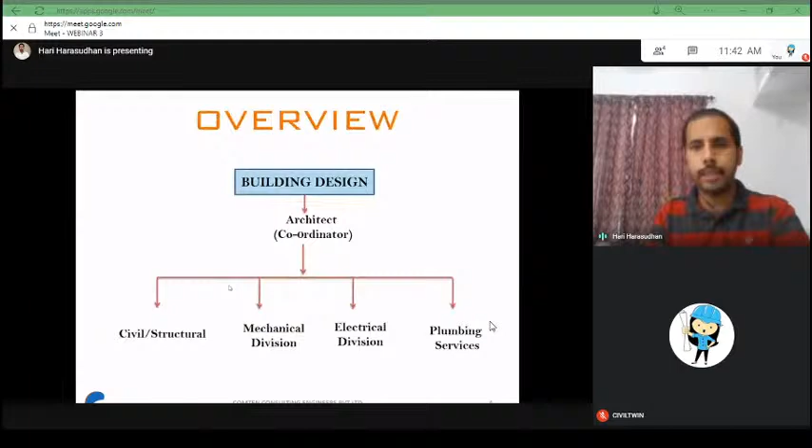In this particular session, I'm focusing only on civil or structural. The other three divisions will not be covered in our topic. So in civil structural, you should start with the conceptual design, then you have to make a schematic, then you will be doing a detailed design.

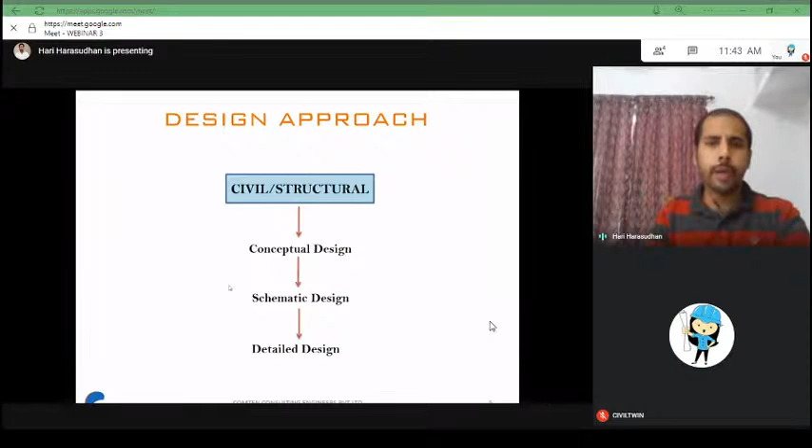In the conceptual design, what we actually do is discuss with the architect and frame whether we should go with an RC structure, steel structure, or precast system, since a lot of other technologies have been booming. So you should understand what kind of structure you should begin with - whether it's a very small commercial building or particularly a residential building, it will mostly be RCC structure.

And if it is a small commercial building, nowadays steel structure is also viable in many cases. For example, if you're designing a car showroom, or even for a small size hospital, nowadays they are doing steel structures. Every option will have some limitations and also advantages, so analyzing all the aspects, you have to freeze what the concept is.

Then precast system is also now one of the emerging technologies. It has its own advantages and also limits. You should understand this and fix accordingly.

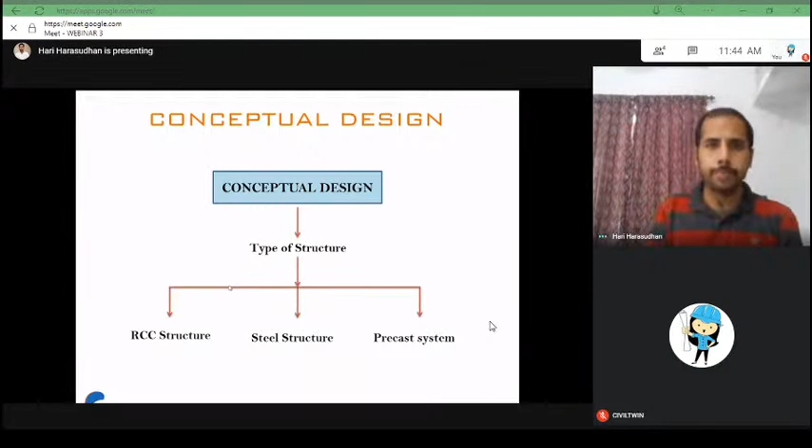Then going to the schematic design: once you have fixed the structural system - whether you're going with an RC system, a steel system, or precast - the next level of development is to freeze the member system, like what kind of horizontal members you can go with, and what kind of vertical members you should opt for.

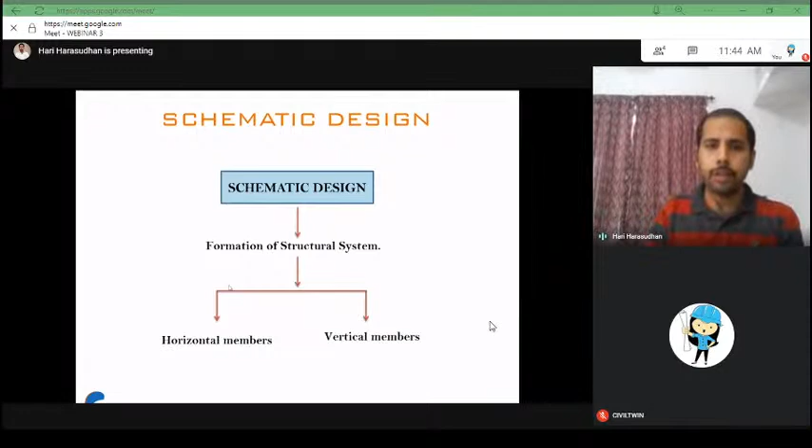For horizontal members, whether you go for a conventional slab beam system - one of the old systems where you can see a deep beam and slab along the horizontal members - or a flat slab, where you won't have any beams, and you can see the column capital or column head at the column position, wherever the column supports the slab. Then another option is flat slab with PT - when the span is more and you want to restrict the slab depth, you can go with the PT option.

And another thing is composite steel floor decking - it means a combination of steel as well as concrete. So you should freeze the system of horizontal members and vertical members at the schematic design level.

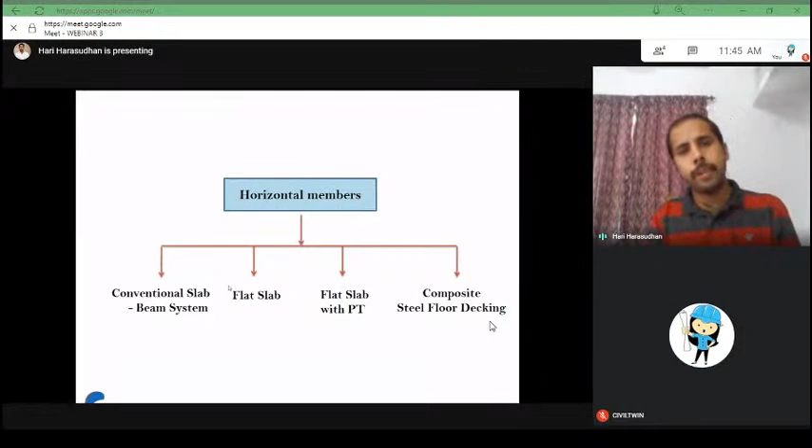For vertical members, they generally resist axial loads and also bending due to lateral forces like seismic or wind, which you have to consider. This lateral force will generate shear and moment in the vertical members, and you should decide whether columns alone should take the lateral force, or shear walls should take the entire lateral force, or you can make a dual system - for example, 25% of the lateral force taken by columns and 75% shared to the shear walls. If it's a steel building, normally bracings will be the lateral force resisting members. These are the things we freeze at the schematic design stage.

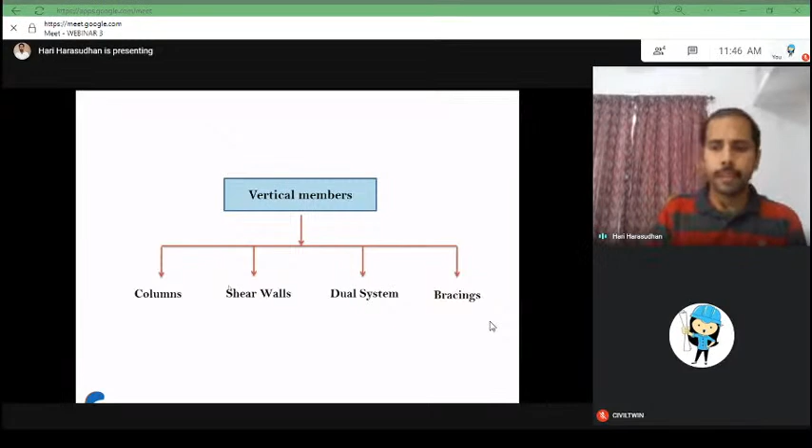In detailed design, you will be doing the structural analysis once you freeze this scheme.

You'll be modeling or analyzing using manual tools. At any stage you should be confident and be a master of your design. You should not rely completely on computers, and you should not let the computer master you. You should master the computer. It's just a tool. Whatever instruction we give, it analyzes to make the time and cost efficient, that's it. We should not allow the computer to master us, right?

Any output the computer gives, you should be able to justify whether the analysis shows correct behavior. When you do a small conventional error in assigning, it will become the other way. For example, for a simply supported beam, rather than giving a bending moment at the bottom, it will show it at the top, entirely opposite. So when you make assumptions or feed the input, you should do it correctly, and you should be able to check whether the computer is giving correct behavior. You should not simply believe the computer to do everything.

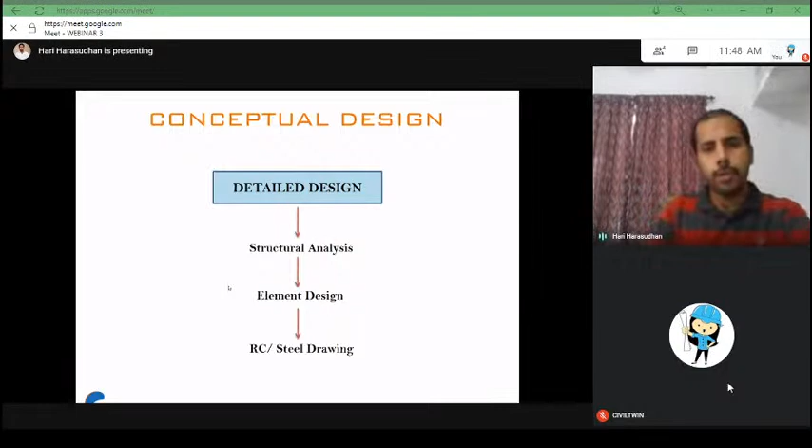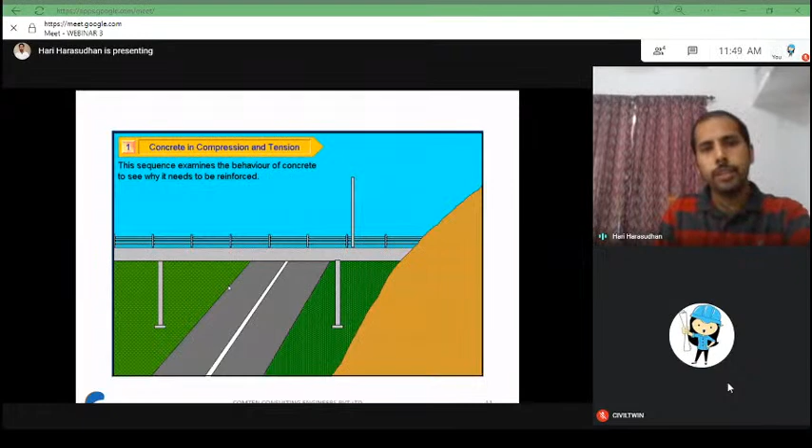So it's a very simple example to understand how each element behaves under various kinds of forces. Here is a very simple bridge. If any vehicle comes and goes over it, you should know what kind of force it will create in every member. Here you can see there are two members: one is the horizontal member, the slab portion of the bridge, and another is the column, supporting that bridge.

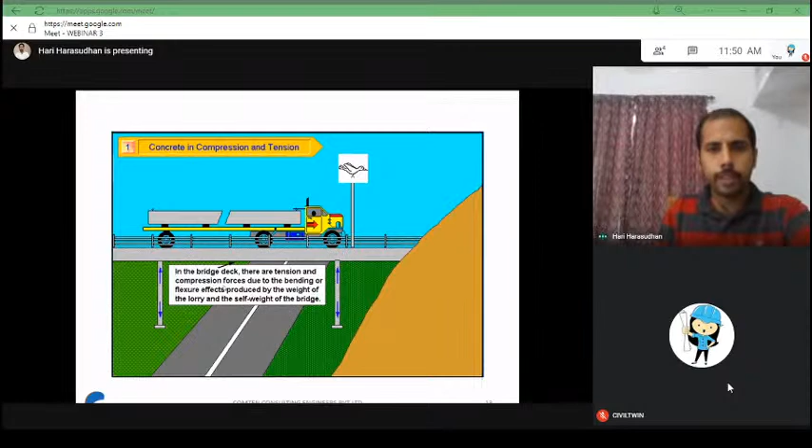When a vehicle or heavy vehicle is standing on that bridge, you know what forces will act on the column. The concrete in the column will experience compression, and maybe a moment based on the slenderness. So mainly compression is the predominant force in the column. If you come to the horizontal member, I can divide it into six portions: left end top and bottom, middle top and bottom, and right end top and bottom.

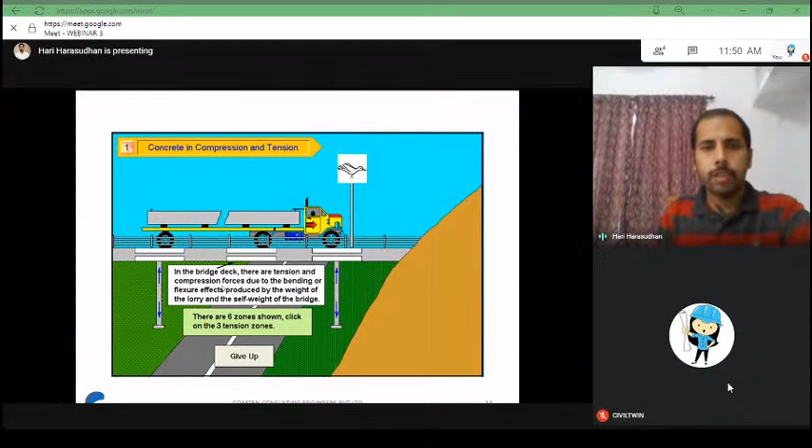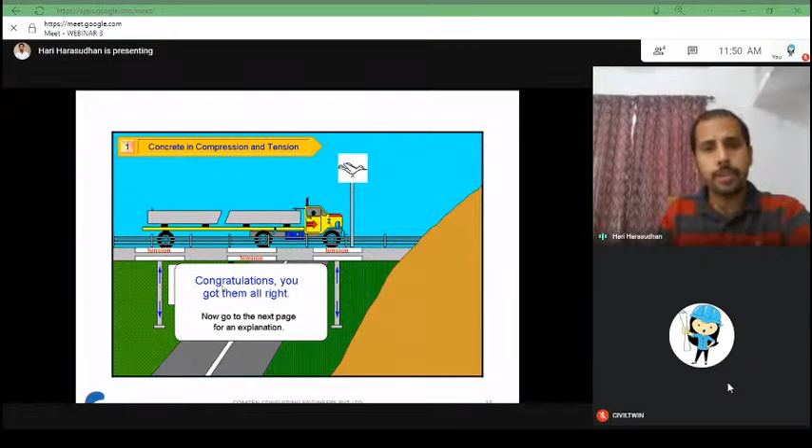Whatever kind of forces act, you should fit it there. For example, in the left top, what kind of force will act? Anyone can see it's like a continuous beam, so it's very common sense that in the left top and middle bottom, it will experience tension, and also in the right top it will experience tension. It's very clear, and the other areas will be compression.

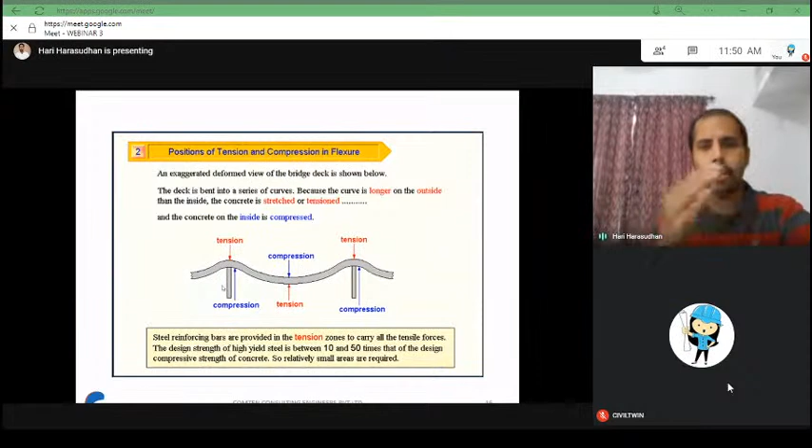This kind of behavioral deflection will happen in that bridge, not to this degree of freedom, but to understand, this is the behavior the horizontal member undergoes when a force acts. You can see where the portions get tension and where they get compression. This is a very simple example. If you understand this small basic concept, you can do any design.

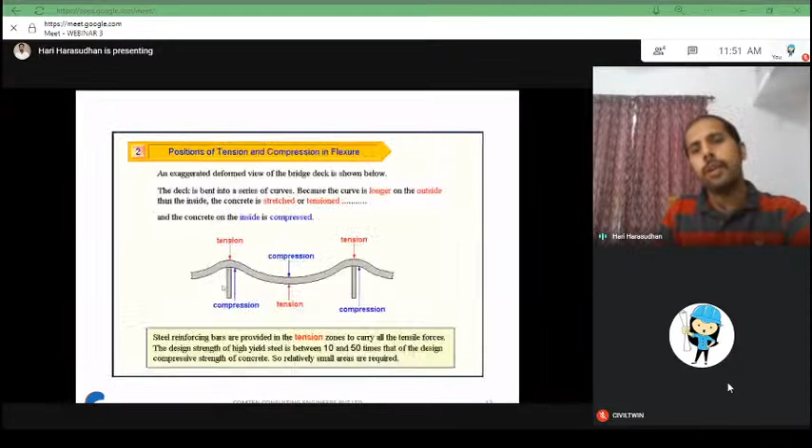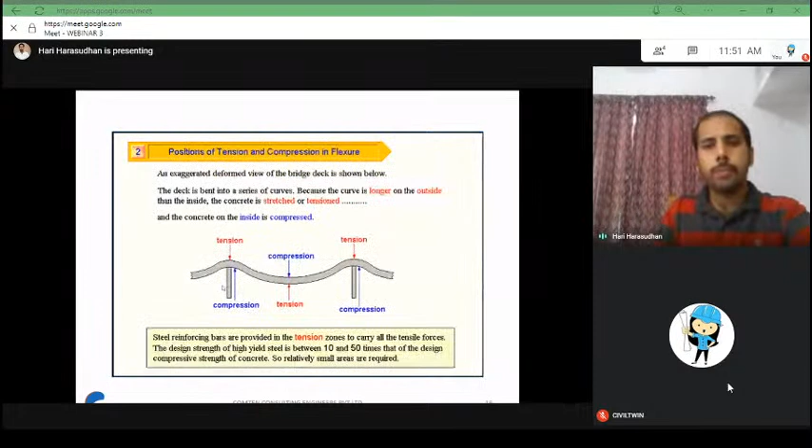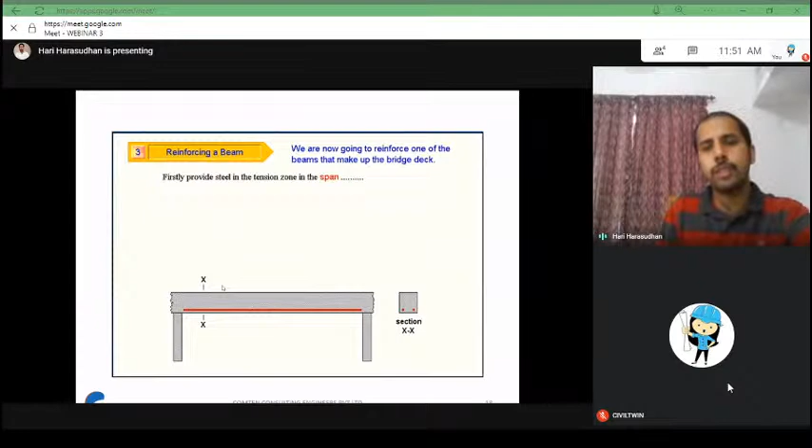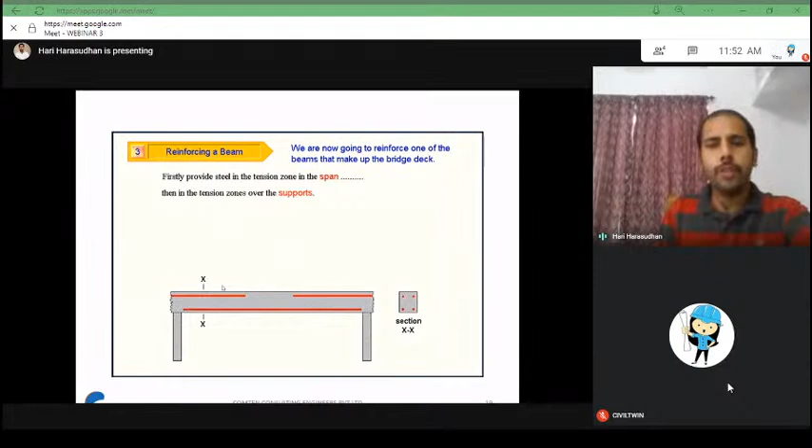You will be providing some minimum steel to hold the shear links. Shear links will take care of the shear forces, and you can compare with if you make a shear force diagram, and if you do the shear link reinforcement design, you can understand what is the importance of shear links.

Yeah, this is how a complete design of one continuous beam looks. You can see the tension reinforcement and the shear links as shown in this presentation. So you can easily understand how we have to design for what forces, and what kind of impact it will have on each element.

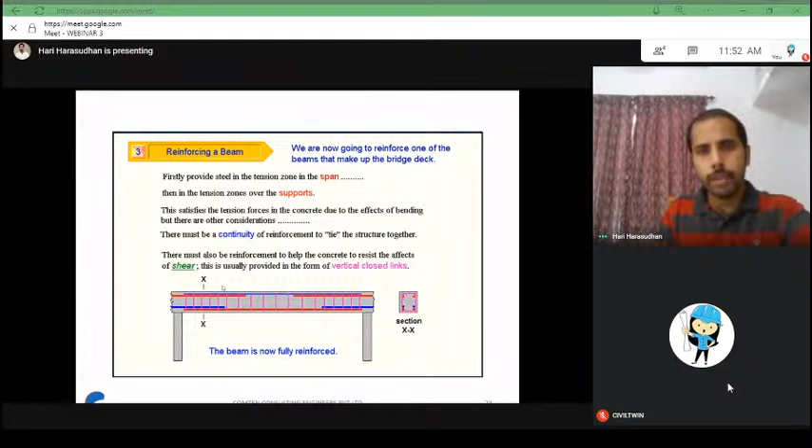When it is a foundation, we'll be giving more cover. When it is a beam, we will give some cover. For the column, we will pick some cover. For the slab, we'll have some cover. So it is this concrete cover that will protect the steel, based on the exposure condition. If it is a seashore area, we'll give some cover. If it is a tropical inside area, we'll give some cover. It acts like a protection to the steel.

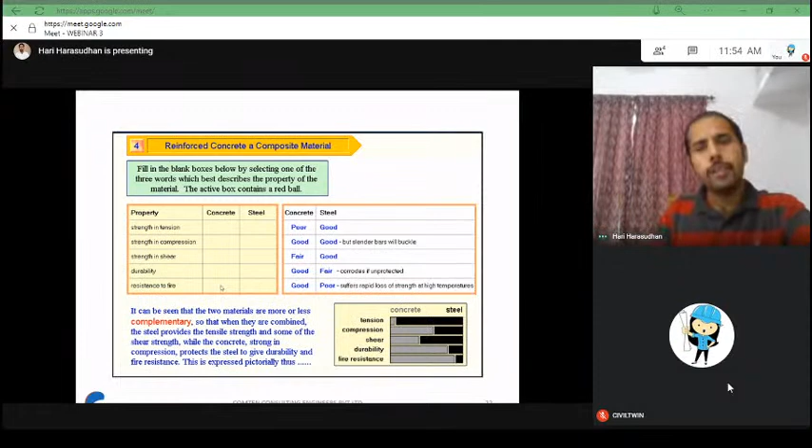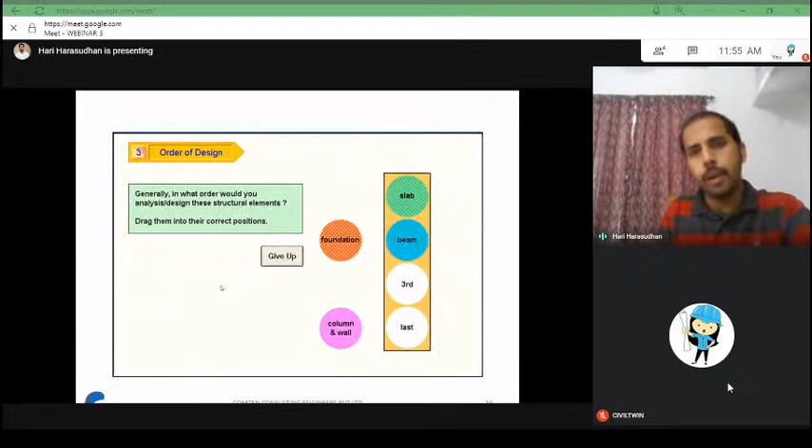Then you have to see the order of design. If you complete any model, like if done in any software, you should start with designing the slab, then slab to beam to beam, beam to column, then finally take it to the foundation. Let's see why we go in this order.

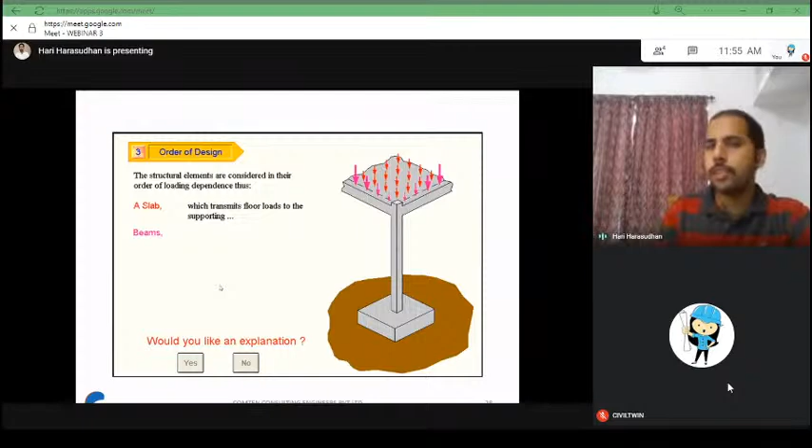Initially, you put the slab loads on the slab member. From the slab, the load will go to the nearer beams depending on the distribution aspect, whether it is a two-way distribution or one-way slab. Based on the kind of distribution, the loads will transmit to the nearest beam member. So all the beam forces will collectively go to the columns as a shear force on each beam connecting to the column. So beams transmit their loads to the column.

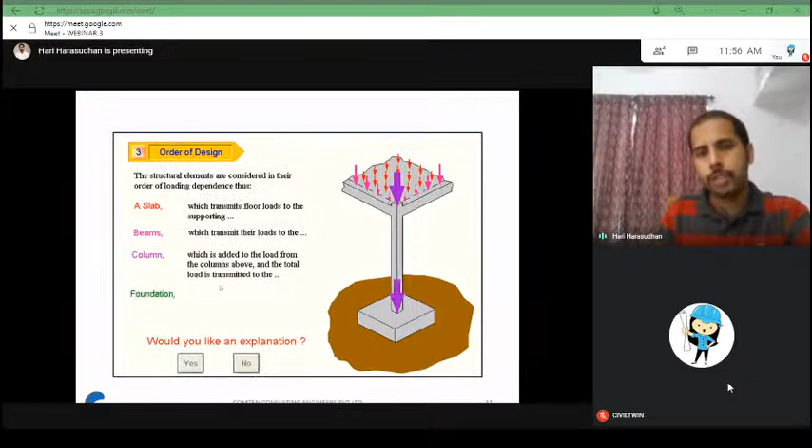Then the column in turn will transmit to the foundation, that is the footing. From the footing, it will transmit to the soil based on the bearing pressure. So if you want to design the foundation, the bearing pressure of soil is more important. You have to do the soil investigation. If it is a very rocky terrain, the footing size will be much smaller. If it is very loose soil, like clay, you will find the footing needs to be of higher size.

Yeah, so the idea is, what is the role of a structural engineer or civil engineer?

If you are doing a design for any type of building, the key idea is you should transmit the force from the functional area. For example, if you are designing a school building, your purpose is to serve the area for classrooms, where loads like students and their benches, tables, or whatever materials will be loading on that. So the load due to dead and live forces has to be properly transferred from the slab to the beam to the column to the foundation. That is the core idea of structural design.

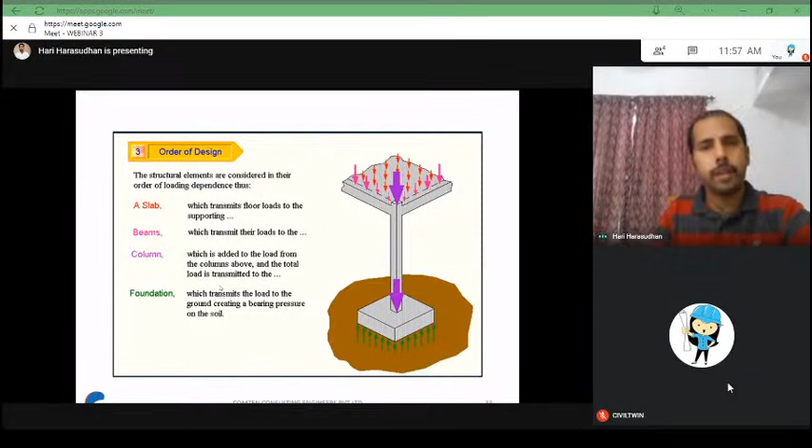You should understand what forces will come to every element, how each element will behave for that force, and how you are reinforcing and designing that member. This is the key idea. And how to design, you can use either manual methods or a computer. Again, I'm emphasizing, when you're using a computer, it's just a tool. You should master the computer, and you should not allow the computer to master your design.

So basics for modeling, the same thing which I've told earlier. You should design every element like column, beam, slab, and footing. Then you should assume what kind of support condition you are making for your design. It all deals with the philosophy of the designer who makes his design. Someone may make it like a fixed support, or someone may assume like a pinned or roller support, whatever it may be for that case. So it's all the design philosophy, the choice made by the designer.

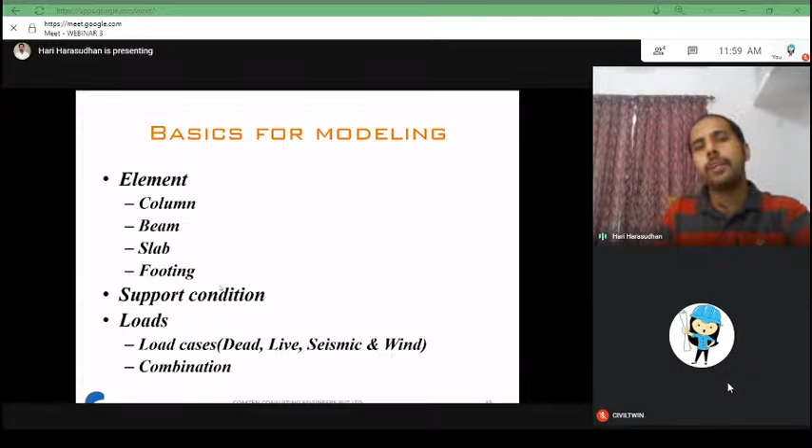You should understand the loads that come to the structure - dead, live, and lateral loads like seismic and wind - and after that you should make the combinations according to the codes. If you are working in a particular country, you should use the combination which their code says. For example, if you are working on an American building, you should use the ASCE codes, not Indian codes or other codes. So it all lies with the client, whoever wants that design.

So the packages are available - for modeling there are some softwares, and for the analysis and for drafting you have softwares. Again, I'm telling you, you should use these as tools only.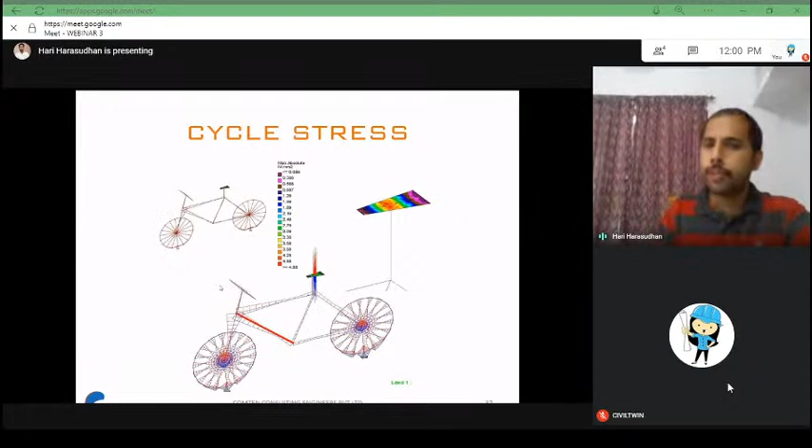So these are the codes. I just want to put to your view that there are standard codes for whoever designs any project for that country. You should follow that code.

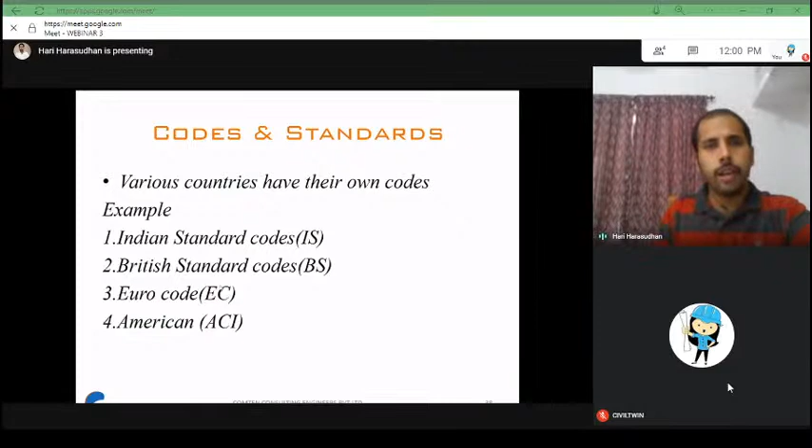For example, Indian standard codes - if you want to do RCC design, you should follow IS 456. For taking the loads, you can see IS 875. For a steel structure, IS 800 is the code. For earthquake design, it's IS 1893. And ductile detailing is IS 13920. Similarly, for each kind of elements - for timber design there's one code, for PT design there's another code. So you should refer to the standards when you're going to design.

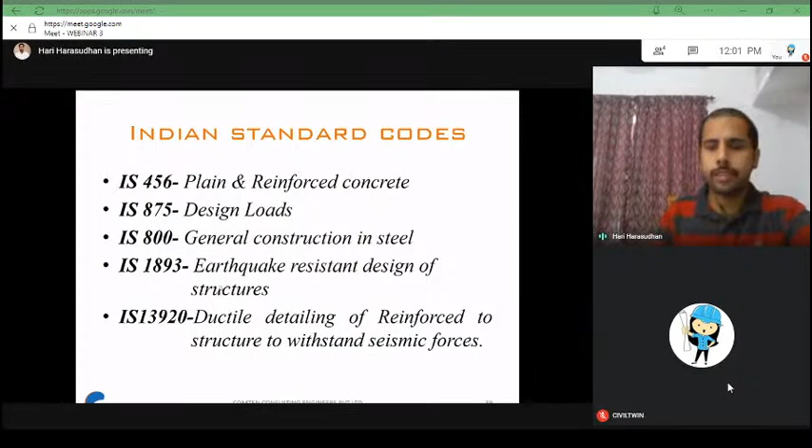Finally, I will conclude - in structural engineering, the idea is you should identify what loads are to be resisted, then how you are taking the load path. You should assume the correct load path. If you are going for a conventional system, or a steel structure, what is the kind of load path you are taking? If you are going for a truss system, an arch system, or a frame system, whatever it may be, that load path has to be defined, and in that load path you have to go for an economical and safe design. That is most vital whenever you are going for a design.

So what is the difference between a professional and those who are practicing out of their experience? When you are going for a professional approach, you will be analyzing and doing the exact safe and economical design.

When persons who have experience are making the design, sometimes they may go uneconomical, or sometimes they may under design. There is a chance. So the professional approach is the safest and most economical approach. You should understand that.

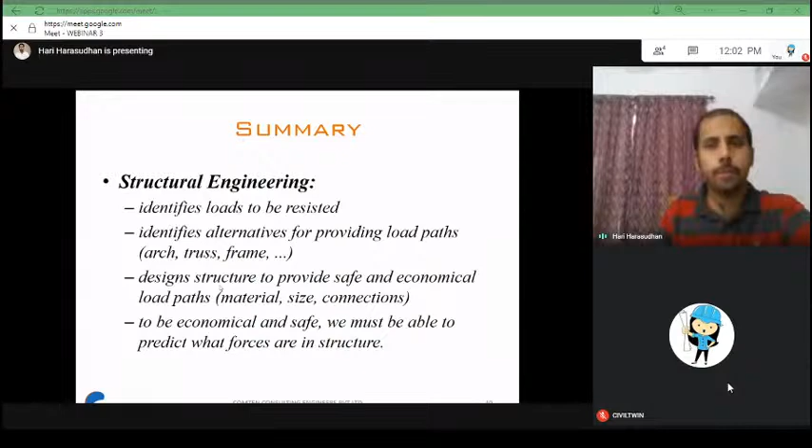So with this, I will conclude my presentation briefly, and I'll also show some of the drawings for better understanding.

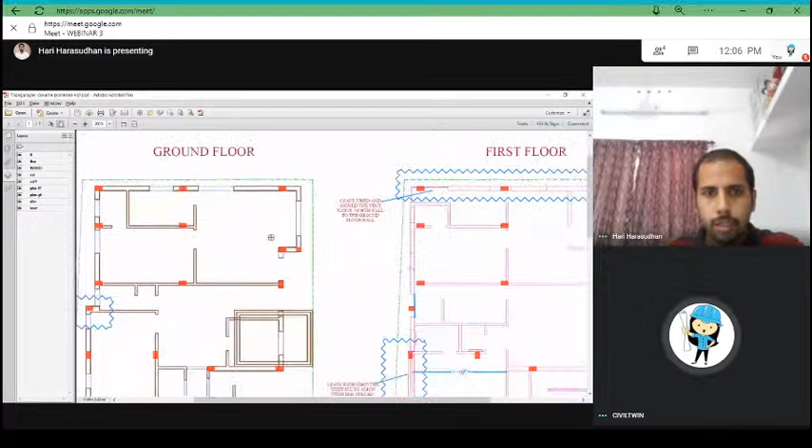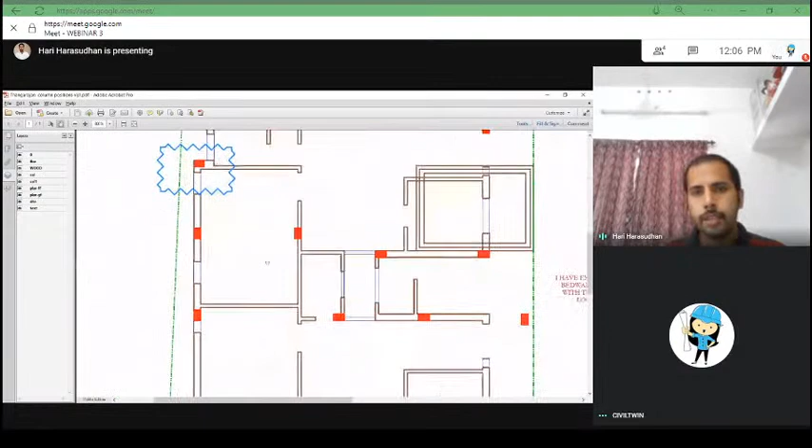So this is one example for a residential building. Normally, the architect will be making the layout for any residential building or whatever the structure may be. And what we have to do is fix the column position in such a way that the architect's idea is respected, since avoiding a column somewhere may affect another utility or look unaesthetic.

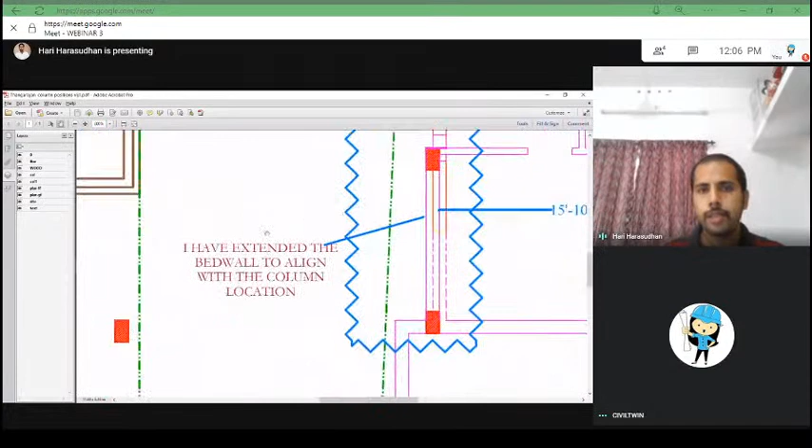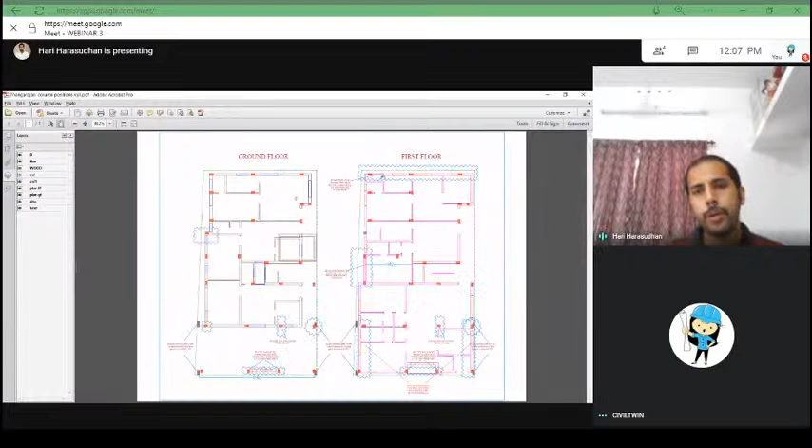He'll give comments like extend the column to the side, or kindly avoid this column. So he'll give various comments. This is the way to start, once the architect has completed the layout, we'll do the column position, then after coming to a conclusion, we'll place the column positions.

Then we'll make a design, we'll make the analysis model in the tool which you are going to opt for.

Is my drawing moving, Manu? You can see whether my drawing is moving. Yes, sir, it's moving.

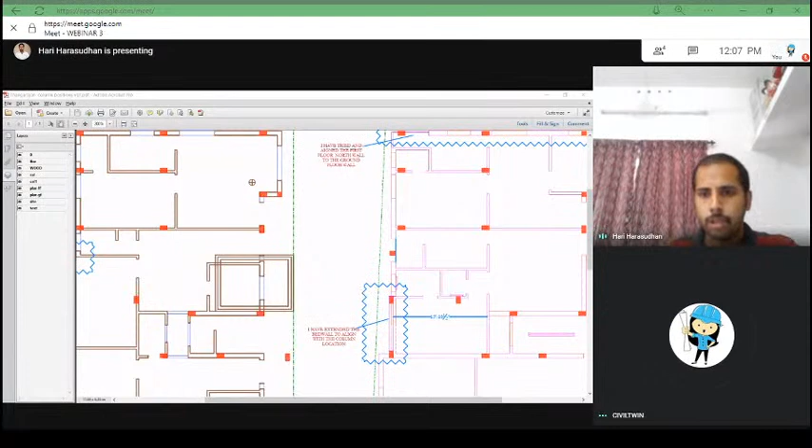Okay, fine. So what happens is, then we fix the column position. Then, one minute.

Can you see the column footing drawing? Yes sir. So this is the footing drawing. For example, after fixing your column position, you will release such a drawing to make the excavation, and for the excavation, also to make the footing design.

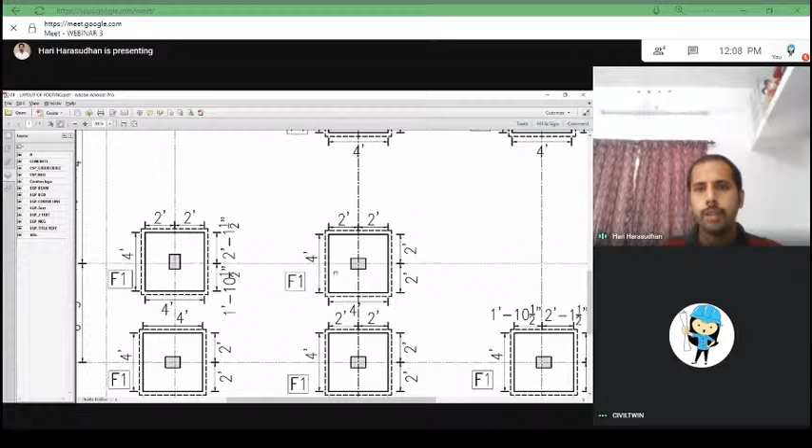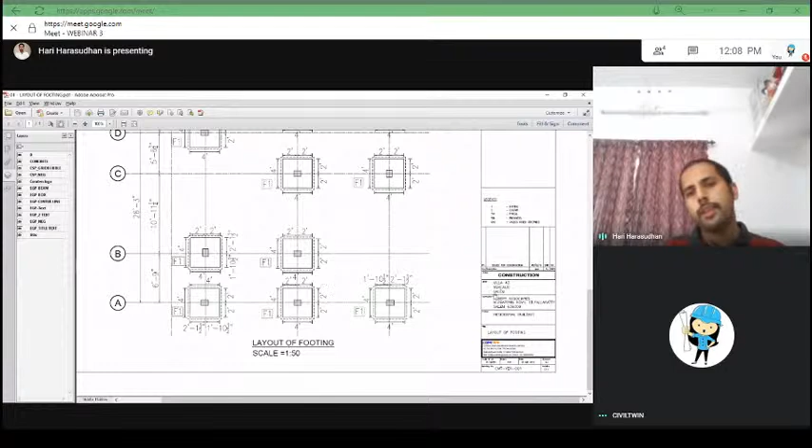So you make the footing sizes, and you make the grid first, and position the column. Then you make the footing sizes, giving the offset from the grid to mark it at the construction site. Based on the drawing, they will excavate the soil, put the PCC, and make the RC concrete pour according to the design, right?

Okay, yeah. Then coming to the column design.

So now, can you see the column drawing now? No sir, no, sorry. Yeah, there's a layout column you can see, I think, hope you can see now. Yes sir, we are seeing, sir.

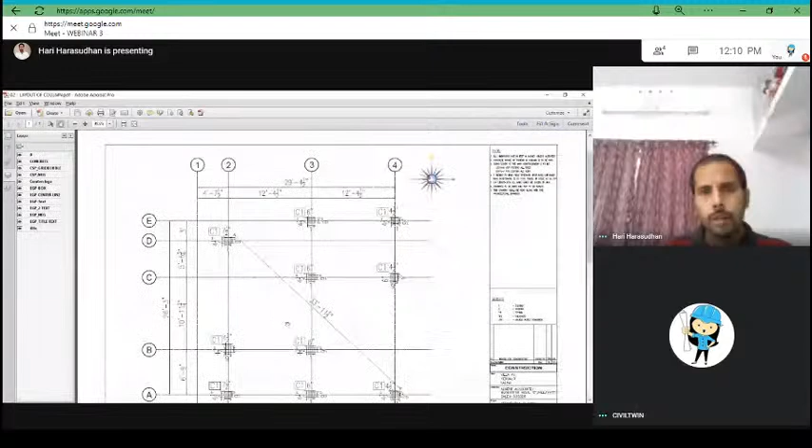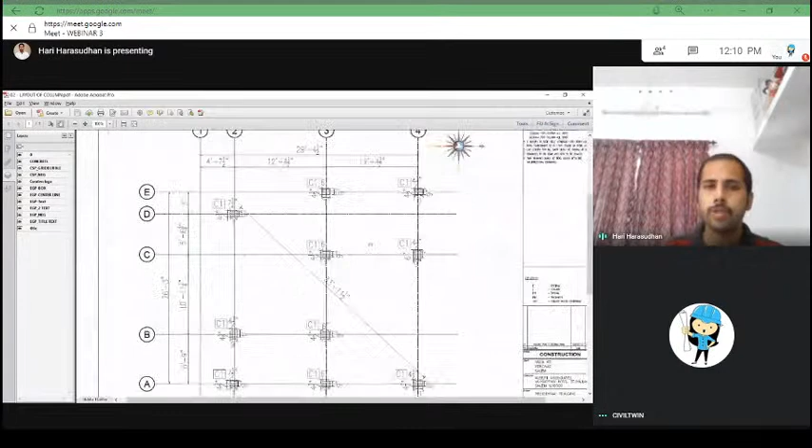Okay, fine. So after making your footing setting out, you should give the column setting out. So based on the grid, after fixing the column sizes, you tell how much offset you need from the grid, and you fix the column. You can do this manually on site, or use digital surveying to fix the column faces. So this is a footing and column drawing.

Then you'll be giving the plinth beam design. You'll be making the layout, and based on the sizes, you'll be giving the reinforcement. So what is the top reinforcement, what is the bottom reinforcement, and what are the shear links you will provide for that beam? You'll be making beam IDs like PB1, PB2, PB3, and you have to refer to the schedule for that design.

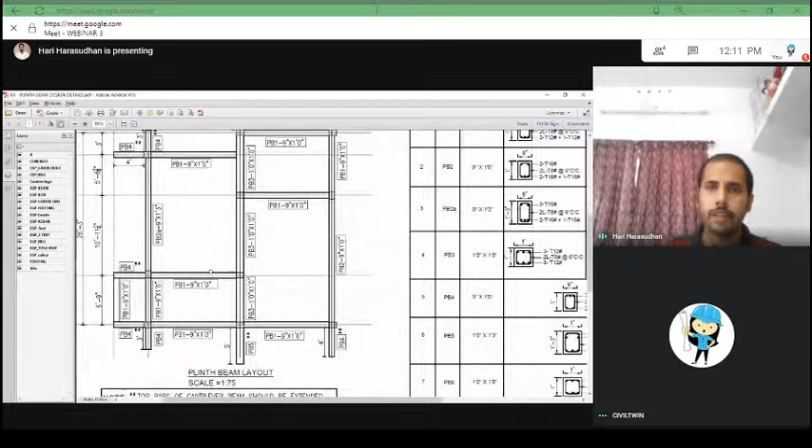The bar bender should follow this schedule and make the reinforcement accordingly. After doing your formwork and placing the steel cage, you have to concrete it.

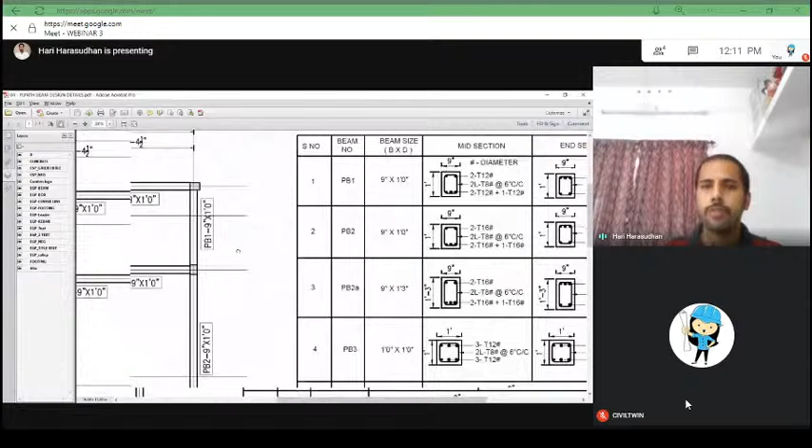In this, there are general things you have to give, like the cover for the concrete structure for a beam and for a slab, what grade of concrete you are going to use for that concreting, and what lap length you are suggesting to implement at site. These are the general instructions you should give while issuing the drawings to make work at site, right?

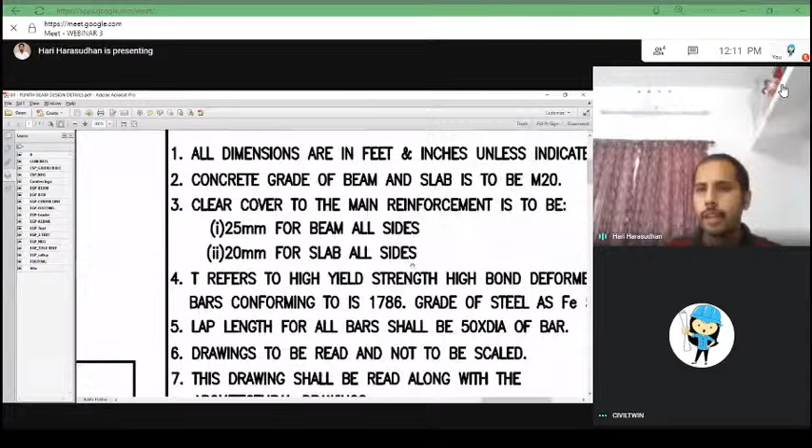And this is a general lapping arrangement for a beam structure. This will be helpful when he makes the reinforcement placement at site, right?

Yeah, so after making the plinth beam design, you should be giving... one moment please... yeah, fine, so there's a...

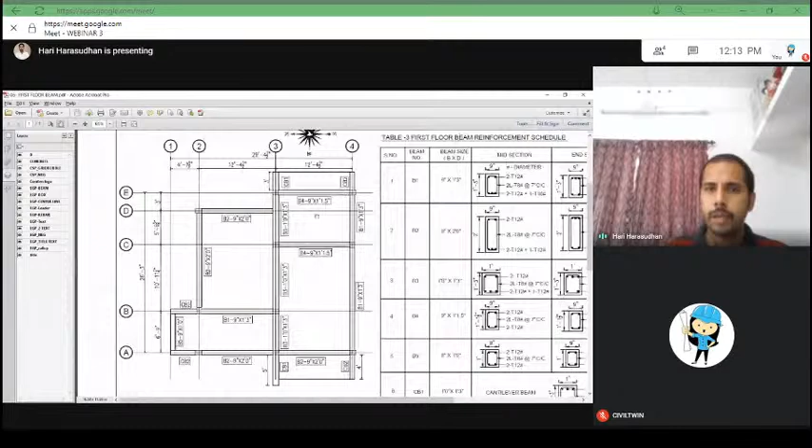Then after completing your plinth beam, you should issue the roof beam structure for the ground floor roof. You have to give the beam design. Similarly, you should make the beam layout and decide the size of the beam, and how you are setting out - this cantilever has to become 5 feet from this edge of the beam, and all the layout you should give. Accordingly, for that beam ID, you will be giving the reinforcement in the schedule column, so they will follow the reinforcement and place it accordingly at site.

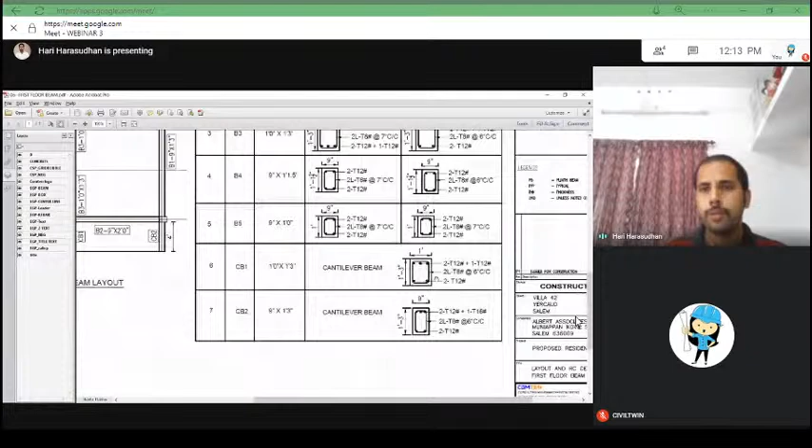For the cantilever beam, you can generally see the predominant bars at the top - there are 3 bars at the top, and at the bottom there is only 2 of 12, probably the minimum reinforcement you should be giving. So when your software gives a higher reinforcement at the bottom for the cantilever beam, it is absolutely wrong - something has gone wrong. You should identify that, and you should keep on checking the concepts then and there to avoid the blunder or fault at any level, right?

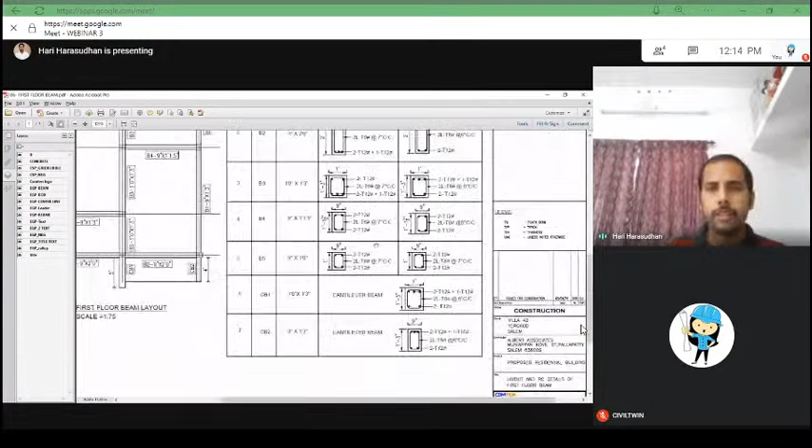Okay, this is the way you will be making the reinforcement schedule for the beam structure, right?

Then finally you will be giving the design for the slab. Whether you are making it a 2-way slab or 1-way slab, you'll be freezing your design concepts, and you will issue the drawings based on your concept of what you've considered for the design, right?

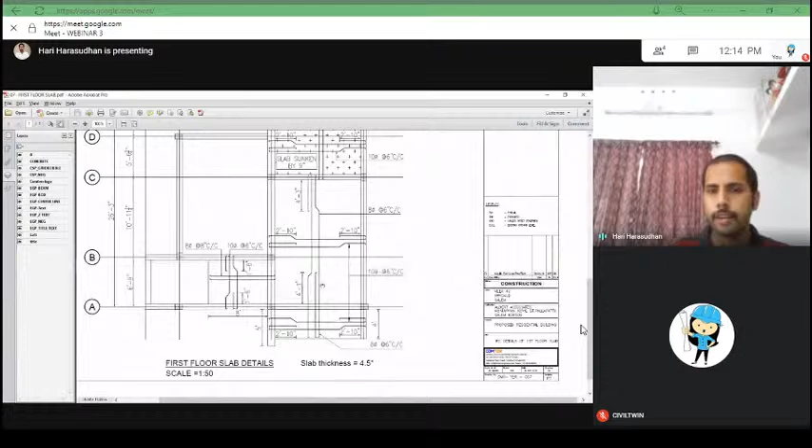So this is how you'll be giving the slab drawings. Like you can see here, there's reinforcement dia, 8 dia bars at 6 inches spacing, and what is the curtailed bar where you have to stop it, and the distance they are shown here, 2 feet 10 inches, and all the things you have to give in detail for the construction site.

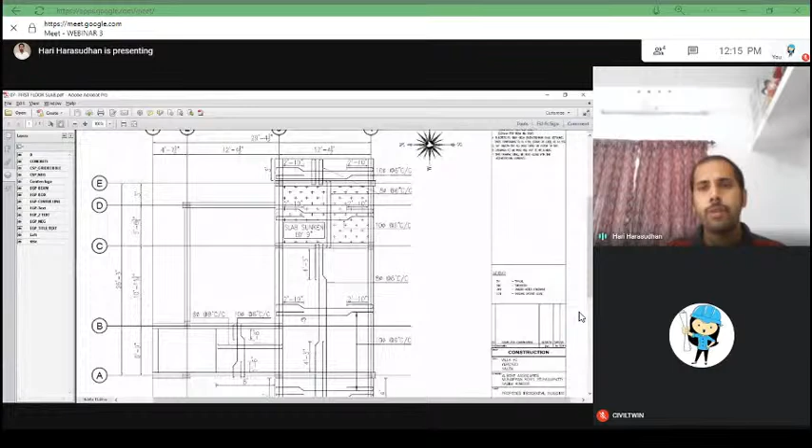So these are the very small procedures you can see when you're doing a design for a small residential building. This is the same process you will continue for any size of building, whether it may be 50-story or 100-story - the concept is going to be the same, only the magnitude of design will be high. So I keep on emphasizing that you should understand the basics first, and then you go for the design.

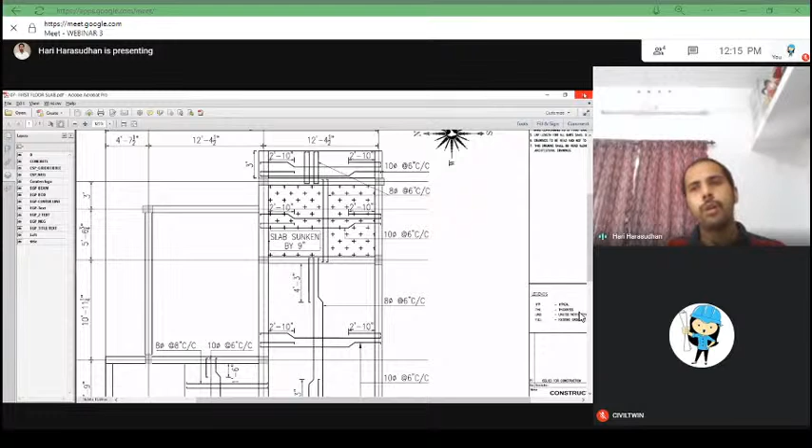So when you're studying from the start of your career, or at the studying level, whatever it may be, just put some extra time into understanding the concepts, rather than just preparing theory. That will be helpful for your professional career, rather than just learning the theory part. I never encourage that. You should understand the basics.

Moreover, I think I've covered a small design for a small building, giving my view on it. When you're doing a complex part, there are a lot of things you have to consider, and that we'll see in a detailed design presentation.

To conclude, in the starting I told you there is a secret of structural engineering. So the secret is nothing - my secret is common sense, that's it. There is no big secret in structural engineering; common sense is the only secret. If you understand the basics, that is going to rule the design. For example, as we were told earlier, if you have a cantilever beam, your common sense should tell you that you should put your reinforcement at the top and not the bottom. That's it - that's a very small secret, and it's bigger than you think.